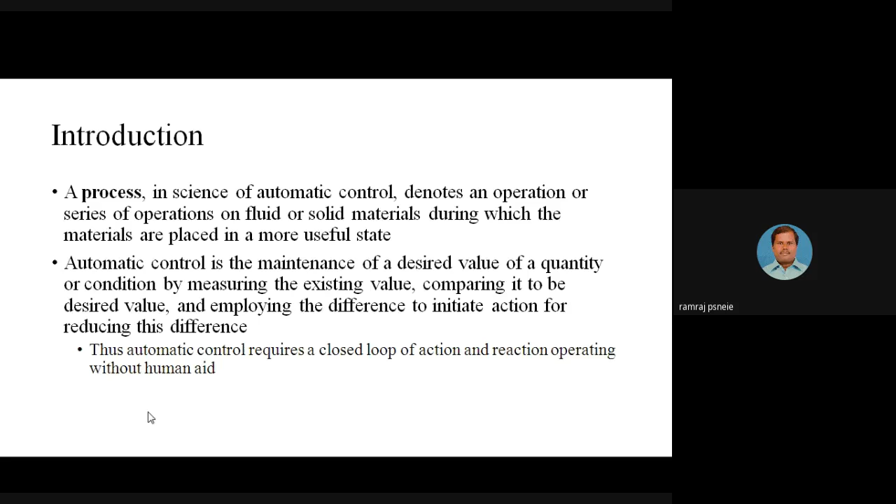The objective of the subject is we should run the plant. How is the plant running? The plant receives the raw material, uses the available sources of energy, and produces the product in the most economical way. To meet that, we need to meet some requirements.

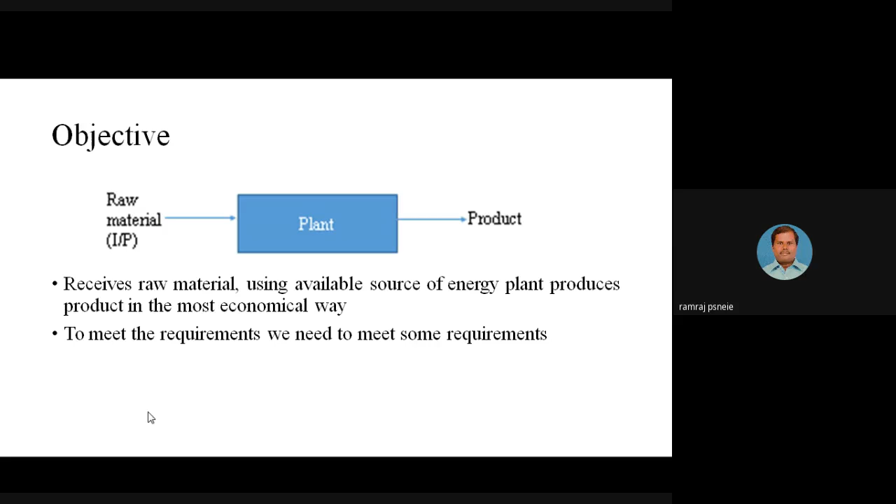What is the necessity or requirement of process control? Process control is essentially deciding how much the input must be changed to correct any deviation in the output from the desired value. The process is taking input. According to that input, the process is giving output.

Suppose you want to change the output of the process, that time you need to change the input, since the output value changes depending upon what you are giving as input. Okay, the output of the process depends upon the input value. So if you want to make any changes in the output, you can change the value of the input. That's the key idea.

Requirements. What is the requirement for process control? First, the primemost requirement of process control is safety. Safety is very essential. As far as safety is concerned, human safety, environmental safety, and instrument safety are very important.

For example, if you are considering a reactor, the reactor should operate within the pressure level of 100 psig, or the maximum operating pressure is 100 psig. That time you should introduce some external intervention. That external intervention is nothing but your control system. It will be useful for maintaining the pressure lower than the maximum operating pressure of 100 psig.

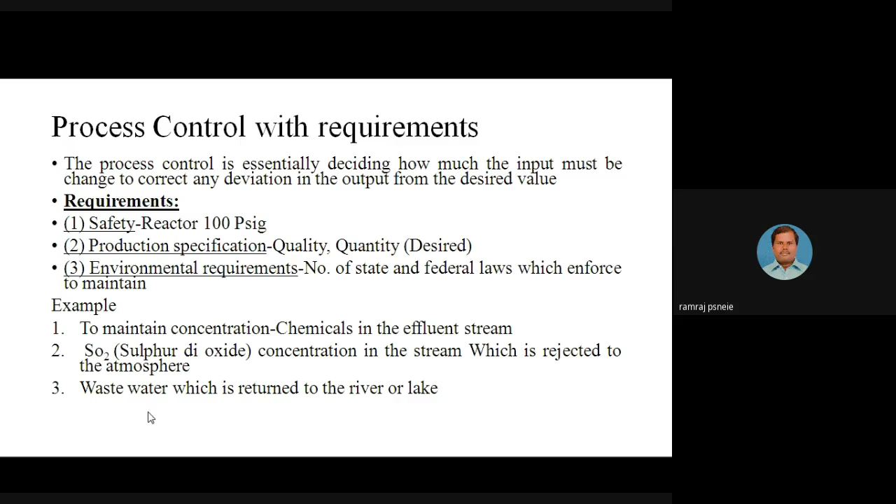Third one is wastewater, which is returned to the river or lake. In industry, a lot of wastewater is produced. That wastewater is left to the river or lake. But the state and federal laws instruct that you should leave the wastewater to the river or lake up to a certain level only. Otherwise, you should recycle the wastewater, then only we can allow the water to mix with the river or lake. In that place also, the control system comes into the picture.

Fourth one is operational constraints. The plant has certain constraints inherent to it. First one is distillation column. In a distillation column, the flow should not be flooded. Second one is tanks. Tanks should not overflow or go dry.

Third one is the temperature in a catalytic reactor should not exceed the upper limit, because beyond that temperature, the catalyst loses its property or the catalyst gets damaged.

Fifth one is economics. We should get maximum profit with the minimum cost. These are all the requirements to meet the plant objective. To maintain all these requirements, some external intervention is required, and that external intervention is nothing but a control system.

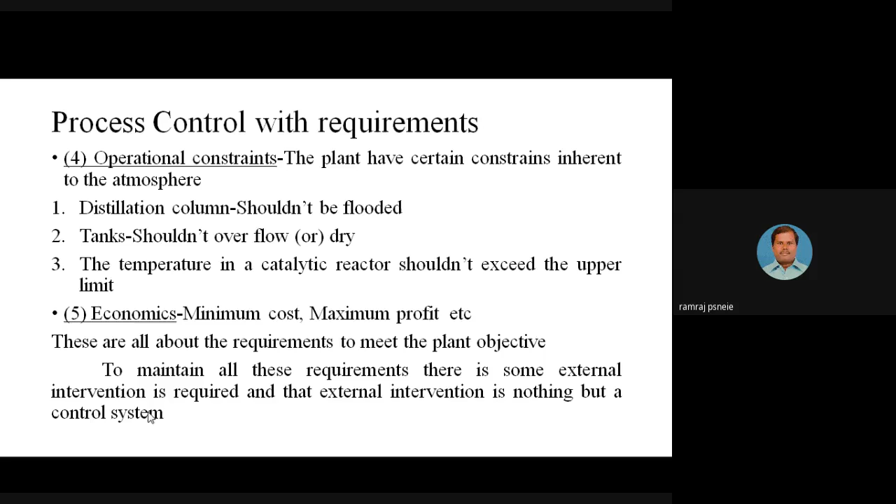Generally, issues occurred in the process control industries. First, the influence of external disturbances. What is external disturbances? The fluid is coming into the plant and leaving as an output. The incoming fluid may be changing with the flow rate or temperature. This is all disturbing the process. All this we can call external disturbances.

Second one is the stability of the chemical process. Stability of the chemical process means at steady state, the process will be maintained at a particular value. That value should be maintained. In some places the steady state value will be fluctuating. That time we need to introduce external intervention to bring the system to the stable condition. Third one is the performance of a chemical process. We should optimize the performance of the process.

What is the need for control system here? To suppress the effect of disturbance. The external disturbance must be suppressed with the help of process control. Ensure the stability of the system by process control. Optimize the performance of the system by process control. How the process control system is useful in dealing with the issues occurred in the process control industries, that is what we are going to see one by one.

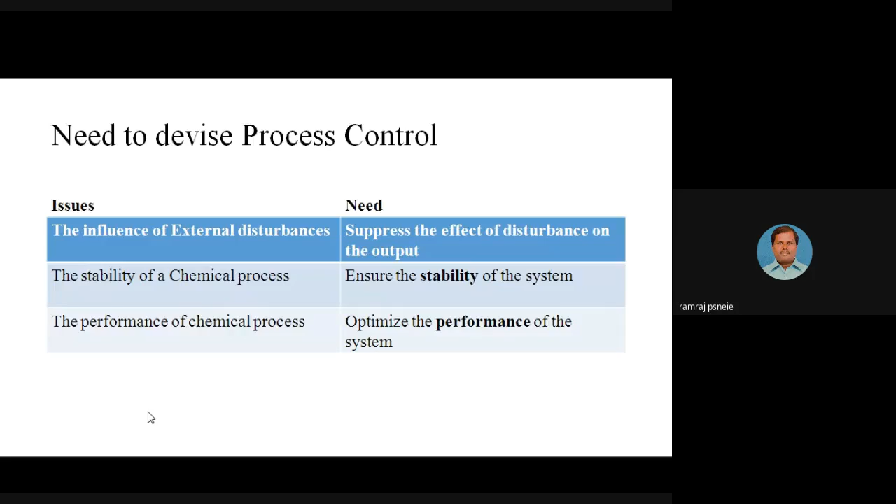First case is external disturbance. For explaining the external disturbance, I take the example of a heating tank system. This one is the tank. In the tank, the inlet liquid is coming with the flow rate of F suffix I and temperature T suffix I. The liquid leaving the tank is flowing with the flow rate of F and temperature T degrees centigrade. For heating the liquid in the tank, I am using coils. Through that coil, we are admitting the steam with the flow rate of F suffix St.

Here, our objective is to maintain the temperature of the liquid in the tank, or the outlet liquid temperature, at the desired value. That is the first objective of the process: T equal to T suffix D. If you want to maintain the temperature at 300 degrees centigrade, you could maintain it. If you want 200 degrees centigrade, you could maintain it. So, your first objective is T equal to T suffix D.

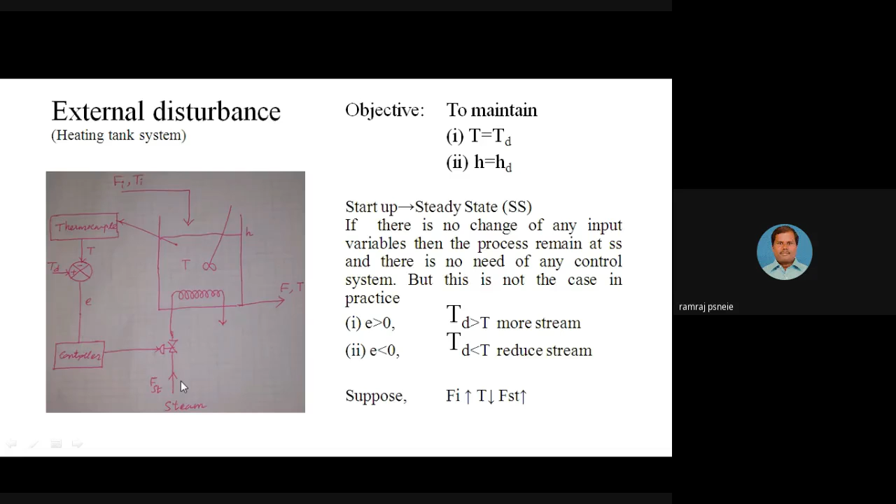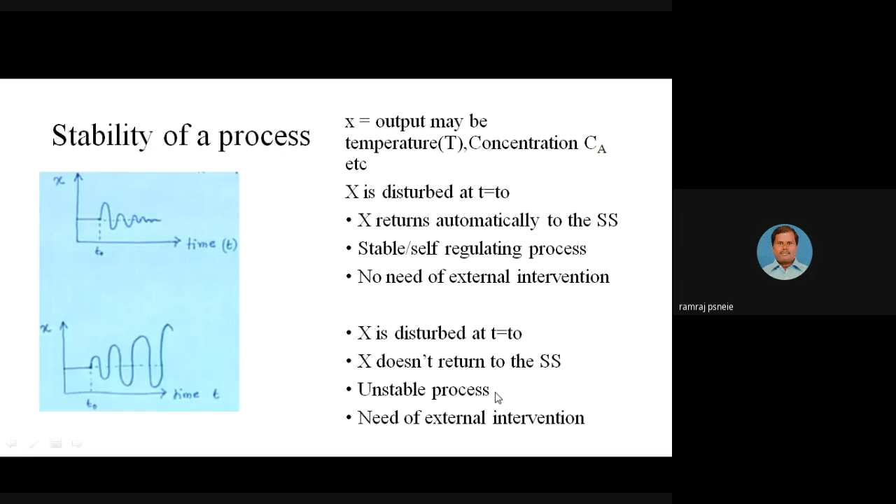Next one is optimize the performance of the process. Here I took the example of a continuous stirred tank reactor. Here two consecutive reactions are taking place. This one is an exothermic reaction. A is the reactant. From that A, desired product B will be produced with the undesired product C.

Here, the economic objective is maximize the profit. The profit depends upon three factors. Maximize the profit phi is equal to integration of 0 to t of B, A, C, where t is your operational time, B is revenue from the sales of product. From the plant, we are producing some products. After selling those products, how much revenue we are getting? That is revenue from the sales of product, specifically mentioned by B.

A is the raw materials for producing that product, I mean the reactant we are using. That one is specified by the letter A. Next, this one is an exothermic reaction. An enormous amount of heat will be produced. The heat must be taken out, and for that purpose we are using the coolant. C is your cost of coolant. So, if you are effectively utilizing the coolant and the reactant, you can maximize the profit. Here also we need to introduce the external intervention.

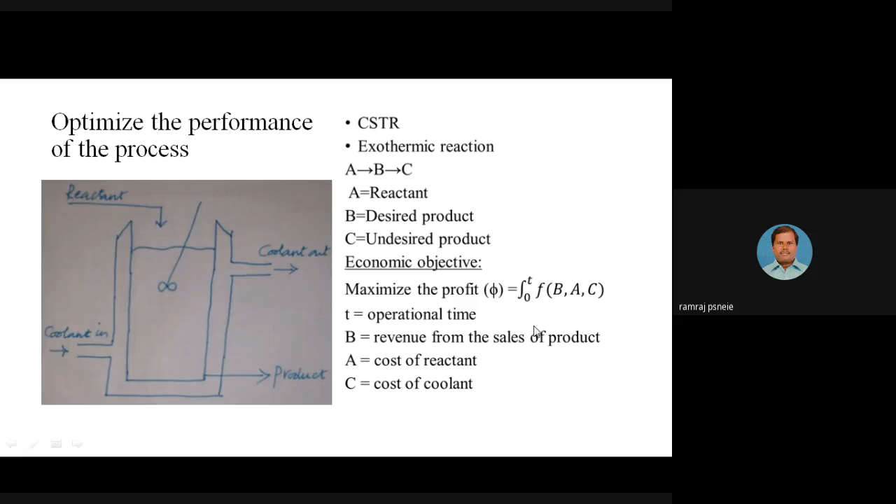Next topic is variables. Variables can be classified into two types. One is input variable, another one is output variable. Input variable can be classified into two types: disturbance or load variable, and manipulated variable or adjusted or control variable. The output variable can be classified into two types: measured output and unmeasured output. Another variable is controlled variable. This may fall in the category of measured output, rarely unmeasured output.

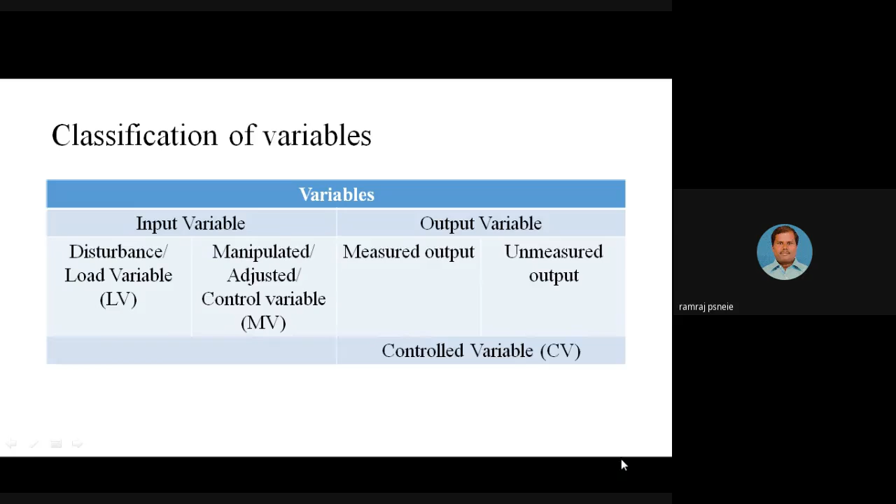Process variables. The controlled variable of the process should be the variable which most directly indicates the desired form or state of the product. Okay, this one is nothing but output of the plant. Second one, the manipulated variable of the process is that variable which is selected for adjustment by the automatic controller so as to maintain the controlled variable at a desired value.

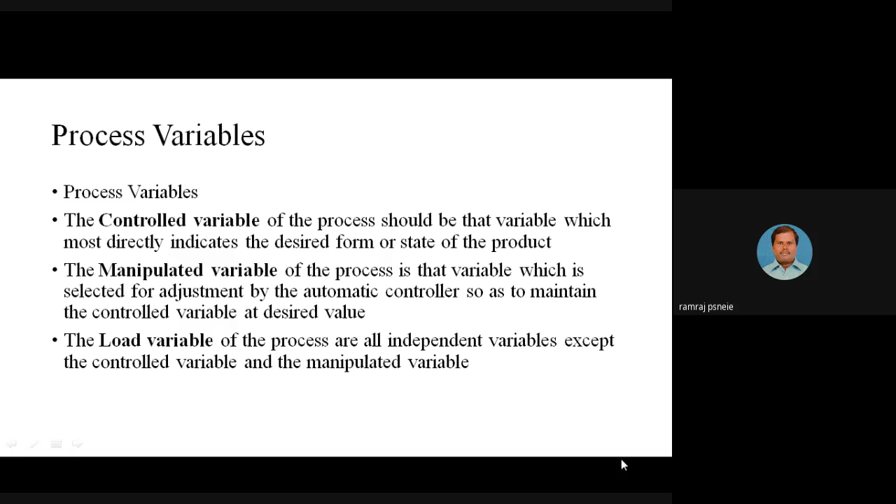We need to maintain the output product at a specified value. For that, which variable are we selecting? That variable is nothing but your manipulative variable. Okay, the variable which is disturbing the process is nothing but your load variable. Okay, we can get still more clarification on the variables with a few examples.

First one is the liquid tank system. Here our objective is to maintain the level or height of liquid in the tank at your desired value. So here the objective is h is equal to h suffix d, where d is nothing but desired value of height. Here we are going to control the height only, so h we can take as controlled variable.

Now we are making the pair of controlled variable and manipulative variable. CV is your controlled variable, MV is your manipulative variable. Here the controlled variable is the height of liquid in the tank. If any changes occur in the height, we need to bring it to the desired value. For that, what are the values we are using? F suffix i and F suffix naught. Fi is your inlet flow rate. F naught is your outlet flow rate.

Here, the input variables are F suffix i and F suffix naught. Why are we putting F suffix naught as input? Here F suffix naught is leaving as output only, so most people will think this is output only. Then why are we keeping it in the input variable list? The reason is that, as we already listed the variables, manipulated variables fall in the category of input variables only.